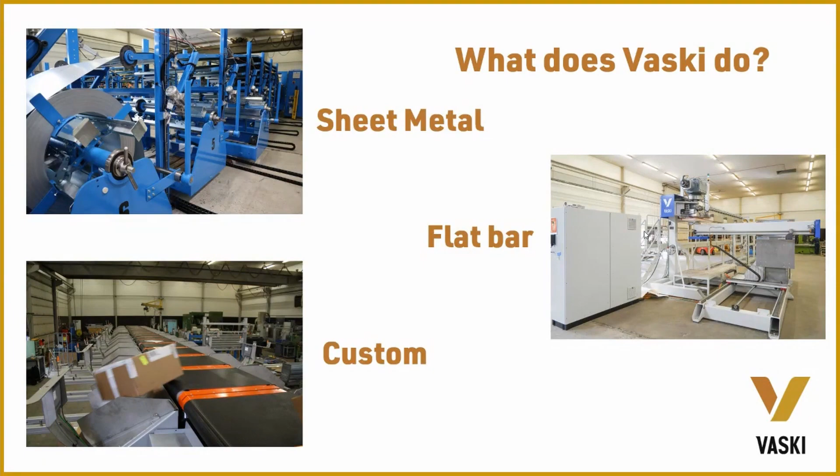So creating efficiency is our vision statement, and in 2 words sums up everything that Vaski is about. We, as a company, we make machines, we create machines, and machines create objects. And of course, what we're really trying to sell is our solutions create efficiency. We're trying to sell efficiency to our customer. So in 2 words, creating efficiency sums up everything that we're trying to be and everything we're about.

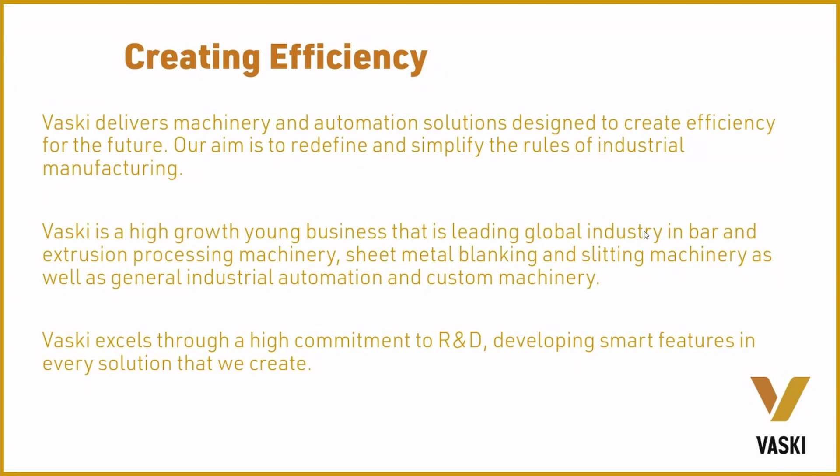Then, of course, if you look at our R&D, naturally, as a high growth company, to be able to achieve that growth, we have to be very focused on researching new products and new technologies. We are investing more than double what a normal company would invest in this industry on R&D, with 18% of our sales in 2020 committed to R&D projects. And that high investment must continue, as it's, of course, the lifeblood of our growth.

Then we have 20 people, and of course, the numbers keep ramping up as well. We've been growing partly organically and partly through acquisition. The original business was founded out of Lahtisen Kone and our business partner Rauno Lahtinen in 2015. Principally it was an R&D company, and then we really started to sell and market machines in 2018 onwards, largely a bus bar business at that time. Then we acquired the blanking and slitting business, HWJ, which is a Swiss business, in February 2020.

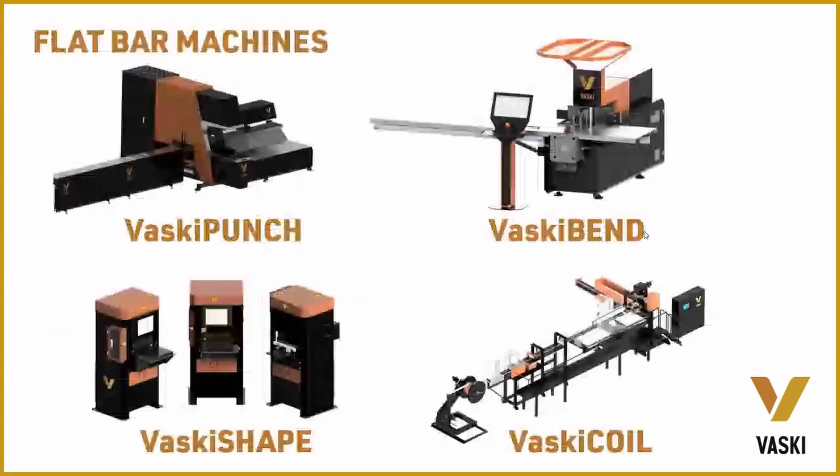So let's move on to discussing a little bit about flat bar machines. We have a very extensive range, actually the most complete range for flat bar on the market today, with entry-level, mid-level, and high-level machines in each category. You could see the Vaski Punch, the new punching machine in the picture, which we'll be discussing in more detail in the next meeting. What's been a key differentiator for us is we're the only company in the world with a fully servo-electric punching machine.

Now, servo-electric has great additional benefits. We're talking between 70 and up to 90% energy savings for our customers compared to traditional hydraulic machines. With hydraulic machines, after some years you start having oil leaks. You have none of that with electrics, which means less maintenance costs. Actually, our measures show 50% of the maintenance cost, and of course, less downtime. The benefits of servo-electric technology are quite significant. Not to mention, it's much quieter. Our bending machine is pretty quiet.

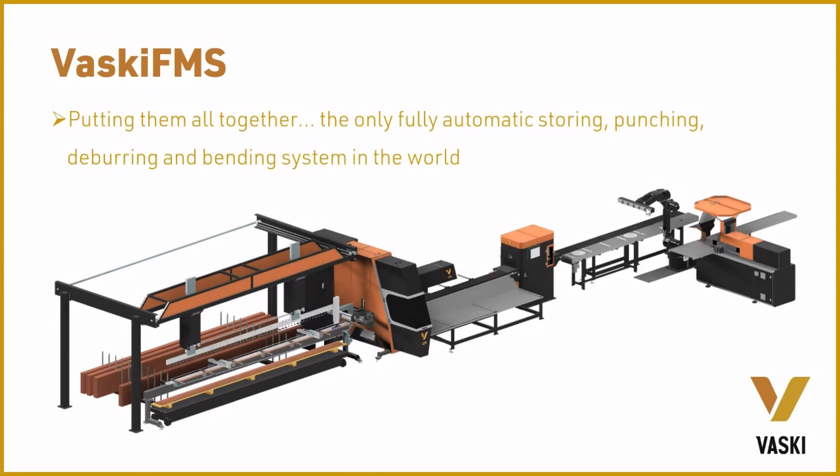So next, we're going to move on to show a presentation in the factory of our VaskiBEND. Let's go over to the factory now and speak with Peksi Varamäki about this.

Hi, welcome to Vaski's factory in Finland. I am extremely proud to present our VaskiBEND. VaskiBEND is a bus bar bending machine with bending force up to 20 metric tons, and it also has a unique and remarkable automatic tool change. VaskiBEND is servo electric, which means significant savings on energy consumption, even up to 90% compared to hydraulic ones. There's also 50% less maintenance cost, which means longer life and less downtime.

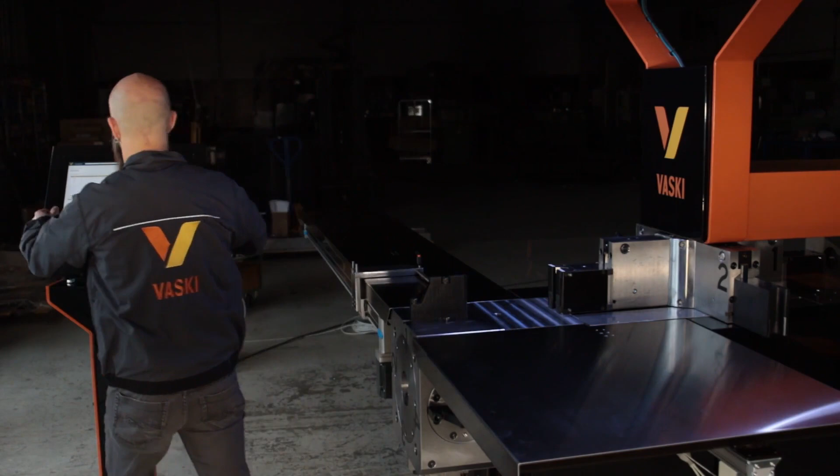So now, off to the control panel. You operate it with a 20-inch touchscreen, the largest on the market. Inside the machine, it's all Siemens, meaning the components are state-of-the-art, giving you the best user experience and machine lifespan.

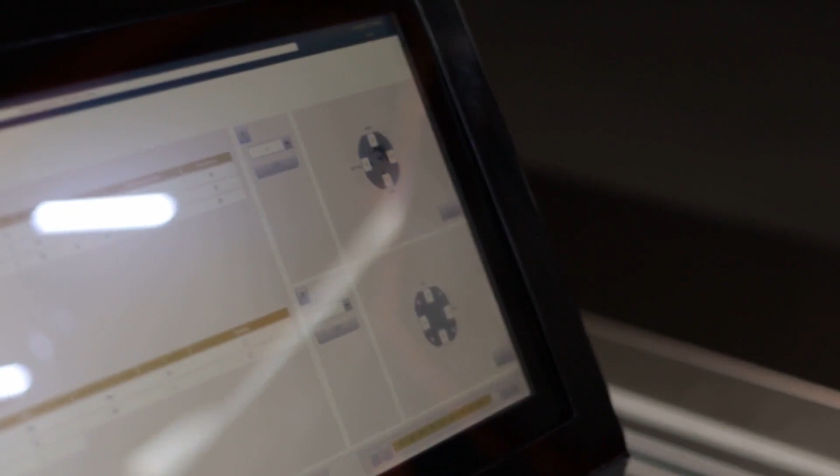Metalix is a great CAM and is widely used in sheet metal. It's already integrated into the majority of major design packages. But if you do have an alternative CAM, we can also integrate that into our machine, the VaskiBEND.

We use a high definition vision system to make sure the bending angle is correct every time, even from the first bend. It also automatically corrects the angle. The beauty of that system is that it's wireless, so there's no setup time and no wired connection to the tooling.

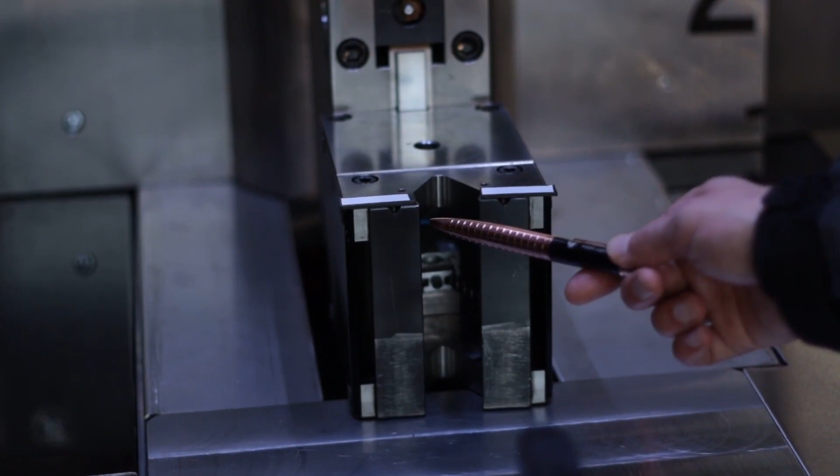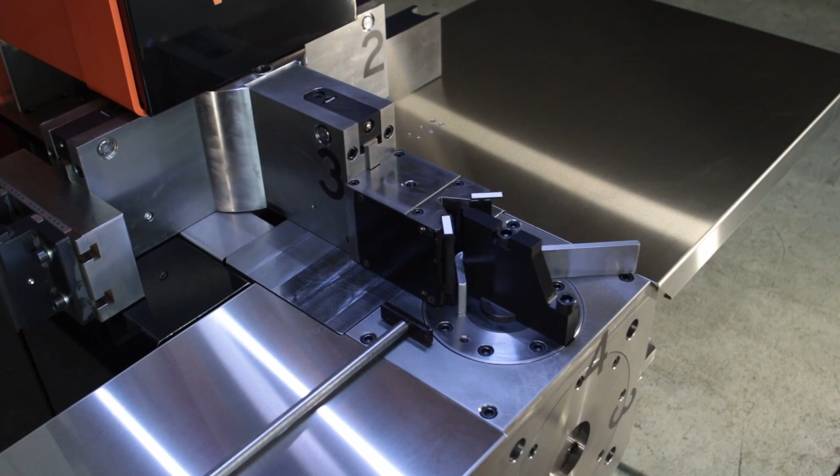And from the tooling, this is our standard basic tool, where the vision system ensures the angle. The standard basic tool comes in 2 different heights, 125 and 200 millimeters, and has rotating pins for 2 purposes: first, to protect the surface of the bended part, and second, as part of the angle measurement. The distance between those rotating pins is defined by the thickness of the part being bent.

So this VaskiBEND has 4 tools: the standard basic tool, the adjustable offset tool, edgewise, and then fixed. Also, our counter tool can be used with both the special and fixed tools.

Thanks for that. Let's now move on and start looking at some bending in action.

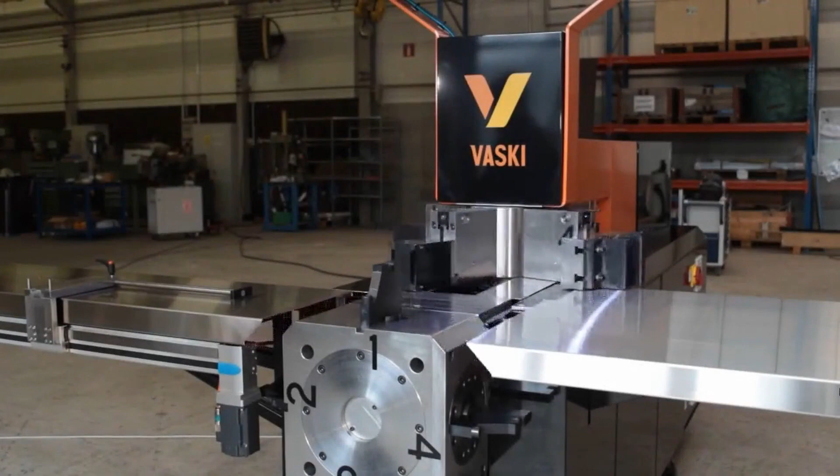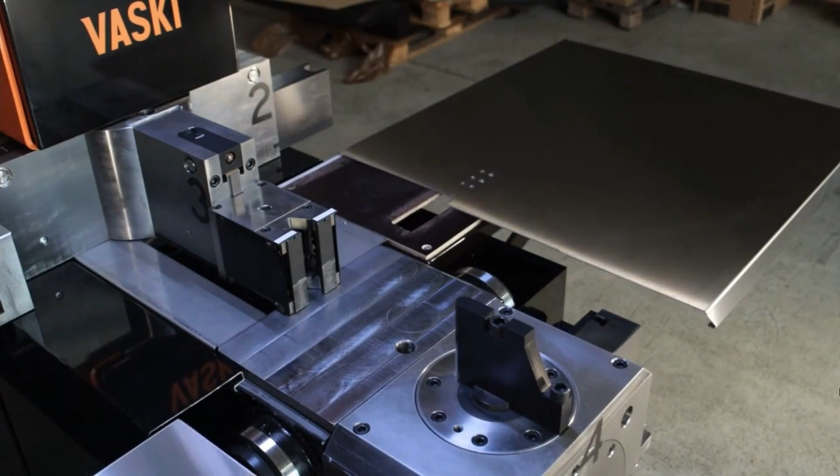So as you can see, that's the same machine. We're showing off a little bit of tool change there, and the tool followed by the counter tool. Usually the two move together, but we're just demonstrating.

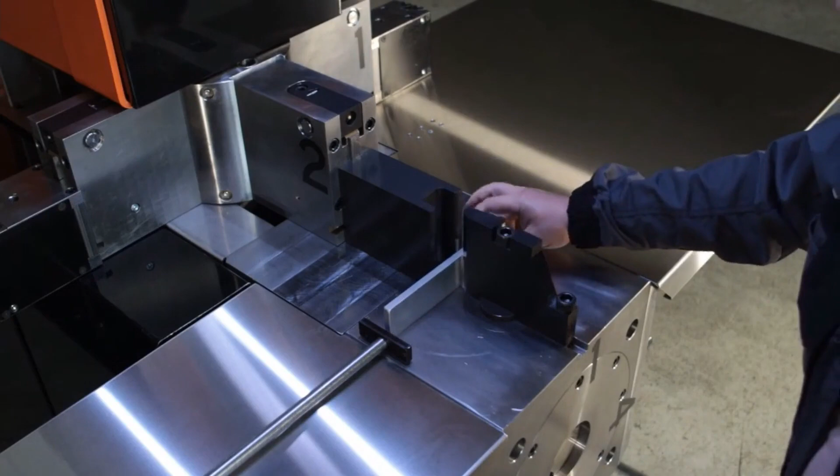So the bar will come in, and now a simple bend. Remove the bar. It'll now select the new tool, and now move the bar back into position and do your second bend. And it really is as simple as that.

The simplest bus bar bending in the world.

As explained, you've got a full array of tooling to select from, and you can sit with our tooling engineers to select the right tools for your applications.

So next in the schedule, we're going to look at the different bending technologies that are available. We're going to start with the entry-level machine, the VaskiBEND Prodigy.

Most importantly, it's a simple and easy to use machine. It has a really nice big HD screen. With a 20-inch screen, there's no entry-level bender in the market like it. It allows you to have a lot more information on the one screen, nice big buttons, easy to read, easy to understand. And that's combined with our brand new state-of-the-art interface.

We have Siemens inside the machine, all Siemens products, which are state-of-the-art. Combined with our new user interface, it's a really simple and easy to use machine.

Then we have the option to have HD vision systems for automatic angle verification. The beauty of this HD vision system is that you can much more easily change the tools. There's no electrical or mechanical sensors built into the tooling anymore, so the tooling is simpler and doesn't require those sensors for angle correction.

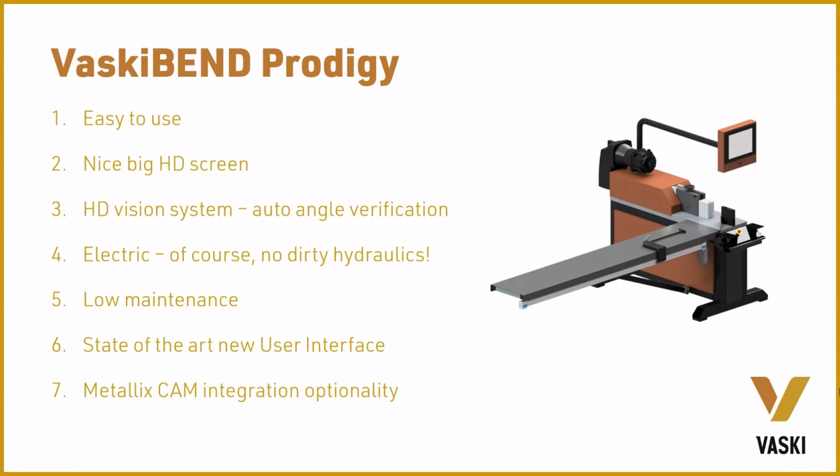And the heavy usership means there's constantly improvements being made to that software.

Then the VaskiBEND Inspiration, which we're launching the new version today. It not only looks the most beautiful machine on the market, it's the best in basically every possible way.

We've gone through the automatic tool change. It's the real game changer in the market, and I'll show you a video on that later to show you really the difference that makes.

Servo electric, which, as we've discussed, means energy efficiency, low maintenance, no oil costs, and longer product life. We have the vision systems available, just like on the Prodigy machine.

The machine is flexible for customization, so it can be fully customized. Now that's a real differentiator. The Prodigy is as it is, but on the Inspiration machine, we're really able to customize to your own needs and technologies. We always ask if four tool changes are enough, but for example, that could be extended if needed. Coming from a background of custom machines and custom automation, being able to customize our standard machines is also bread and butter for us.

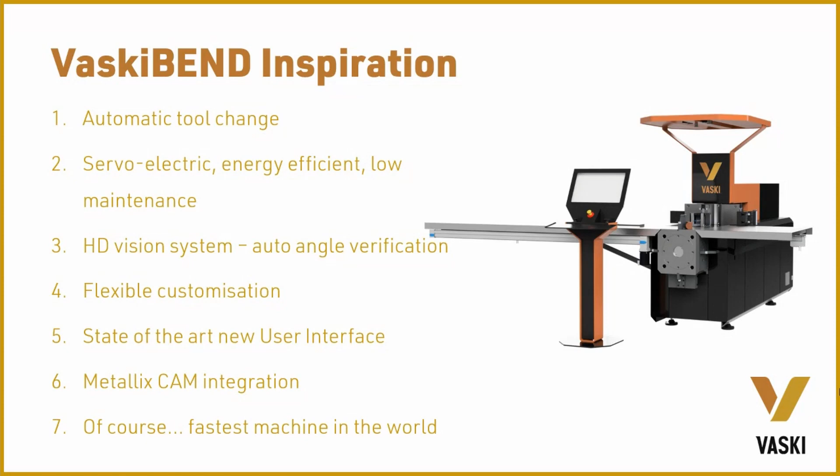Naturally, the interface and the CAM are shared across all the products. And then with this machine, aside from all of that, this is the fastest machine in the world.

Now a small desktop device that I'll take you through. It's a really simple to use machine, very competitive, doesn't occupy much space, and can be put on a pallet into your pallet racking out of the way if it's not heavily used.

But the key is, by not having complex torsion bending tooling integrated into the bending machine, we're able to offer the tooling for the VaskiBEND Prodigy, but not for the Bend Inspiration, as it's prohibitively large to install onto the Bend Inspiration.

However, although it can be installed on the Bend Prodigy, it really does occupy valuable bending time. For the price difference for a basic desktop machine, it's not really worth buying the tooling with all the hassle of tool change. And actually, it's not easy to make the tool change, as anyone who's operated that tool change could well explain.

We also have a CNC option available on order. Naturally, it's always electric for us, no dirty hydraulics. And most importantly, this is available off the shelf - we hold these in stock at all times.

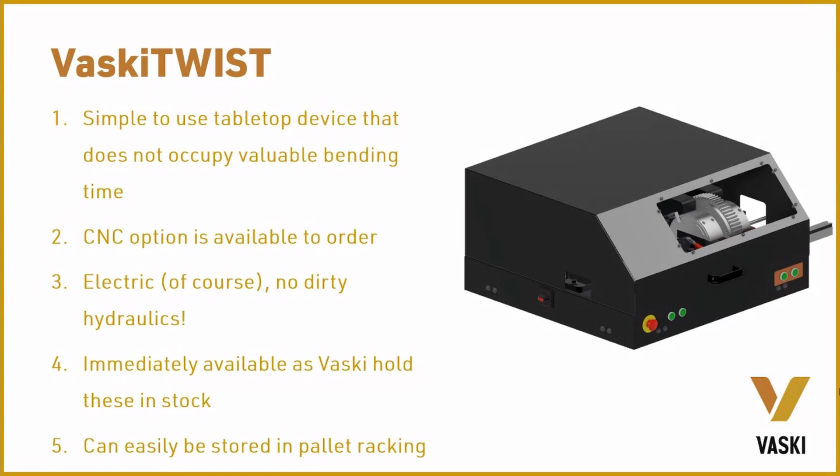Finally, I'm going to revisit the Vaski FMS. What the bending machine really does for the FMS is pull bending technology into play for automation. You'll see rival offerings tend to show storage connected to a punching machine as a standalone unit, but we can go from storage, punching, end finishing, and bending.

The reason bending is brought into play is, if you only have one tool, there's very little you can do in terms of parts with just a single bend, same bend every time. So with the multi-tool change, now you have lots of different options for different materials, different bends, and different tooling built into the punching and bending machine. That flexibility brings FMS systems, flexible manufacturing systems, into play.

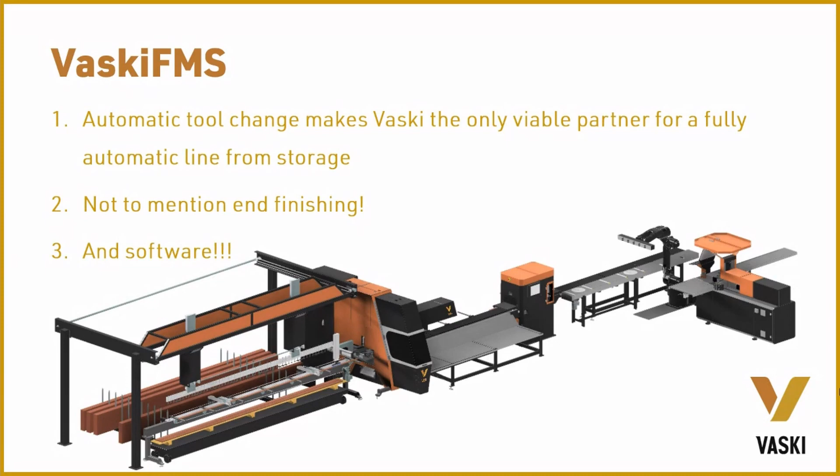So we are the unique company able to offer this solution. And of course, we have the new software, common across the products, which really allows us to bring all the machines and the connectivity of all those machines together.

Next, we're going to go through a quick video showing you the power of the automatic tool change technology. I'd like to say, before we start, this video was actually created under the Rodform brand, and Rodform, as you will see, is the old name for what's now become the VaskiBEND.

So we're going to now see, on the left-hand side, there's a traditional single tool bending machine, and on the right-hand side, we have a multi-tool machine. Both have the same operator and both are being operated at the same intensity of working.

We're doing an initial 45-degree edgewise bend, followed by a standard 90-degree bend. On the right-hand side, you can see the multi-tool - how quick that is. You may have noticed the new machine we've been demonstrating is even faster than this version of the machine.

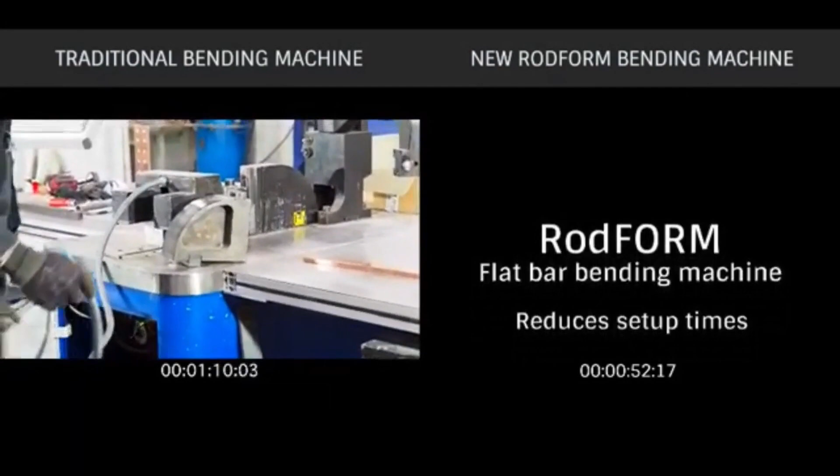So on the left-hand side, we're still waiting for the tool change from the first bend. I have to say, all credit to that machine on the left - it's a machine from a rival supplier, but it's probably the best alternative on the market. I think you can see the difference.

I'm not going to mention who it is because it is a good quality supplier. But you can see the complexity. Luckily in this case, the new tool that's going to be attached to the machine is close to hand, which may not always be the case.

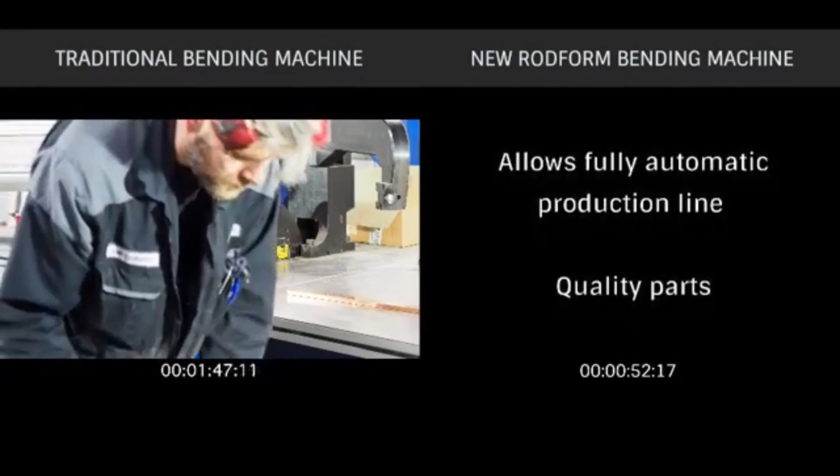Anyone who's changed those tools will know this operator's making the tool changeover process look like a relatively easy process. Those are quite heavy tools there. I think the operator on the right has his cup of tea ready by now.

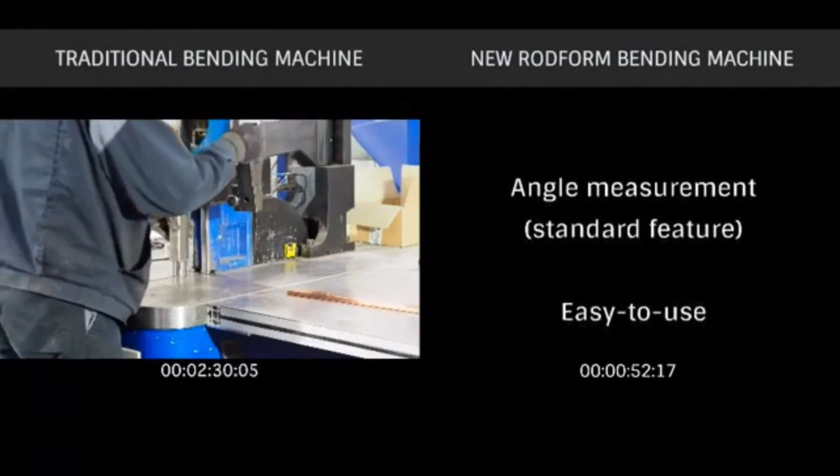So wiring up, as I mentioned earlier, is eliminated because we don't have a touch system - we use a vision system for automatic angle correction.

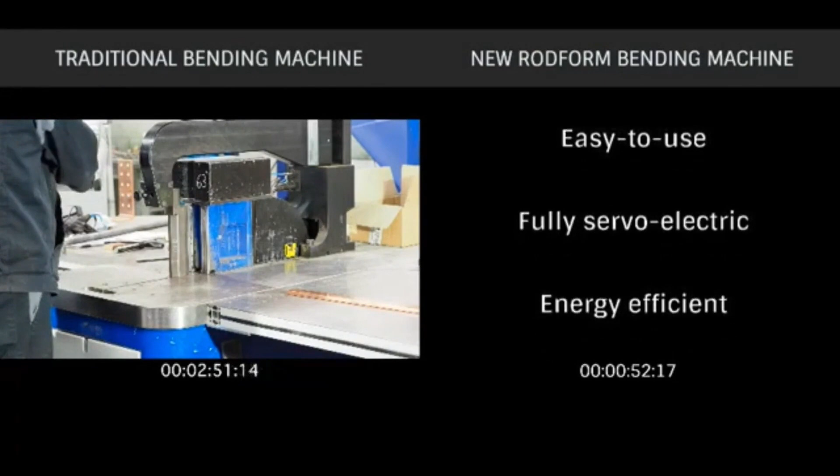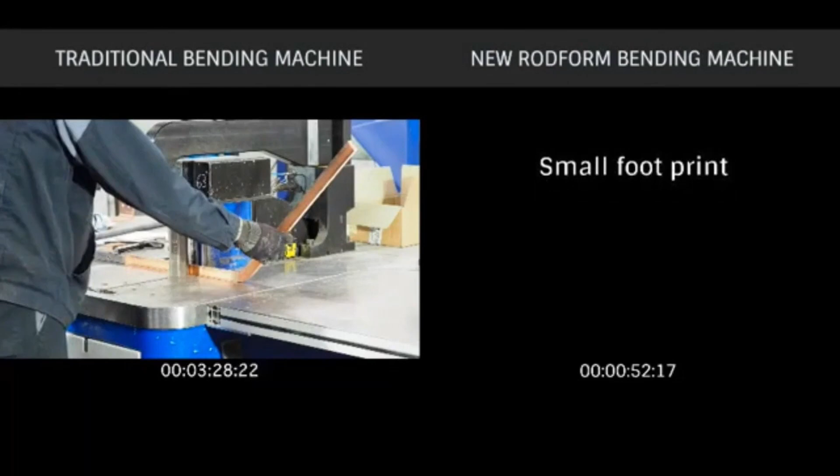And all credit to this operator - typically, in reality, in a production environment, this whole process normally takes 10 to 15 minutes. Actually, he's working at a good pace and doing a good job here.

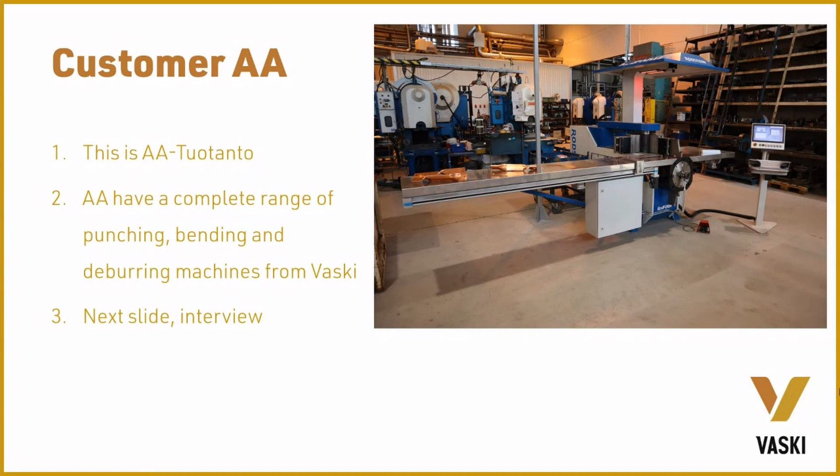So next on the schedule, we're going to go over to Peksi again. He's gone to see our customer, AA Tuotanto. AA Tuotanto have a complete range of punching, bending, and deburring machines from Vaski. They've been working with us for a couple of years - a great little company here in Finland. And we have a video now of an interview with the customer to hear a bit from them.

Hi, I'm Peksi and I'm gonna take you to one of our customers to see RodForm. This RodForm is with previous colors and the previous brand, but it's RodForm. Come on, let's go.